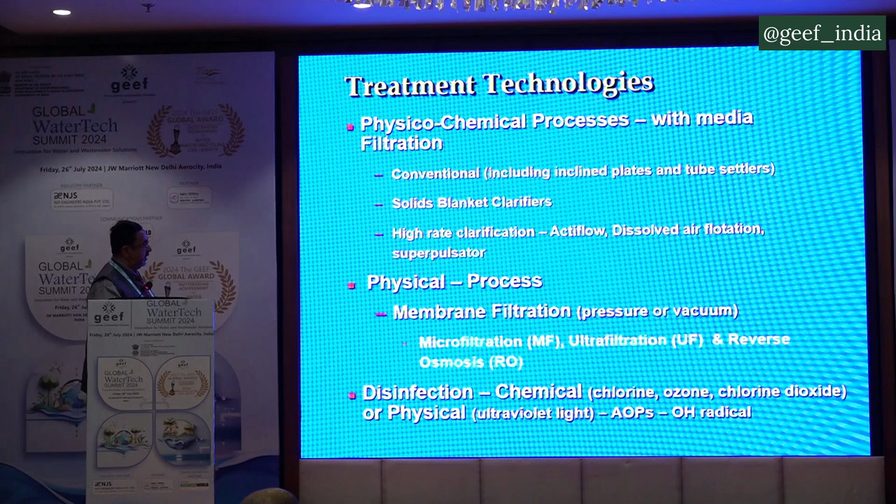Then the membranes came in. These are basically hollow fiber membranes, tubular membranes, ceramic membranes. So the advancement went slowly from the normal filtration process, which is your sand filter, to membranes, which are 0.1 micron or 0.01 micron or 0.001 micron and so forth. And the particle size gets lower and lower in the process, giving you cleaner water.

So that's an advancement. It changed the size of the plant, changed the footprint of the plant, so that gives you much better applicability in terms of water availability, because you can get 98%, 97% plant flow without much reduction going back to backwash and so forth.

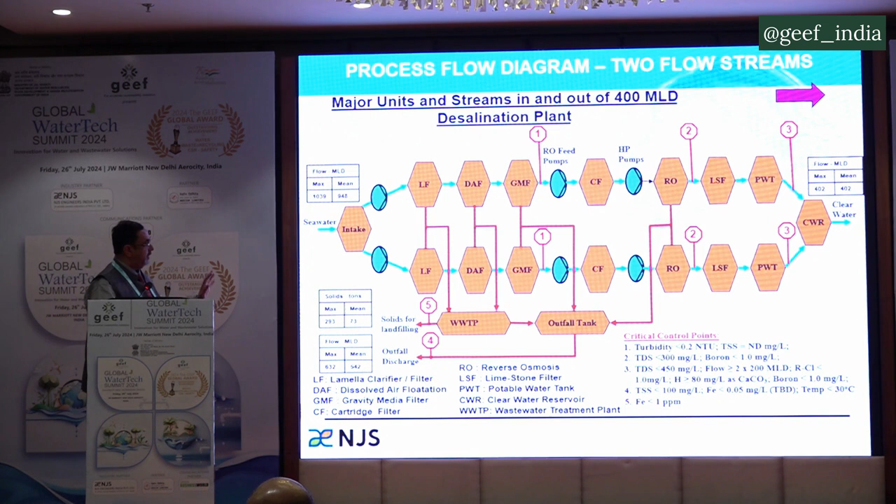Nowadays there's a lot of discussion happening. This slide is talking about desalination. I'm not going to go into details, but essentially the reason I'm putting this slide is because the cost of RO is substantially higher.

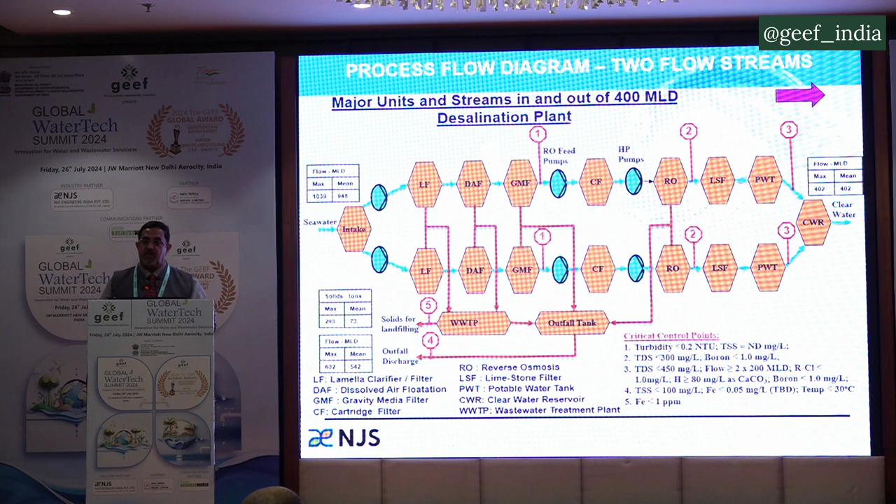Typically the electrical energy requirement is around 3.2 kWhr per meter cube. This changes the cost because that cost is now being shifted through power generation and energy recovery, and you can generate almost 45 to 50% energy back. That's a device that gives you much better energy for what you're technically using. That's an advancement in innovation and so forth.

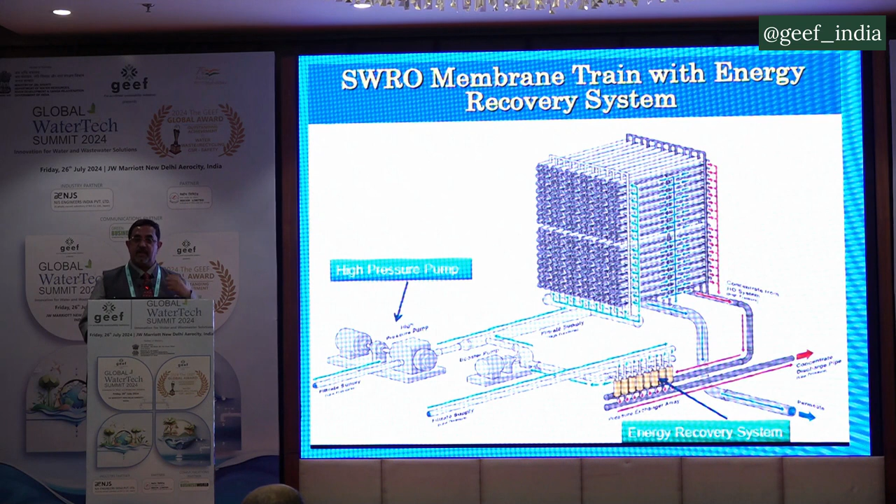What's happening in the industry now is moving to forward osmosis. It has come to pilot scale, 10 to 15 MLD capacity. But why has it stopped for drinking water so far? Because you need a stronger gradient across the water surface so that water can move from one end to another, and that is exactly happening on the industry side. It will come also on the water side to give you much better availability.

Why will it go so much faster? Because if reverse osmosis gives you about 2.8 to 2.9 kWhr per meter cube electrically, this will only give you 0.3 to 0.4. So the cost of water production will go substantially lower regardless of the TDS you're dealing with. Normal TDS in surface seawater is about 37,000 to 42,000 milligrams per liter, plus or minus some percentage. But that will make life much easier.

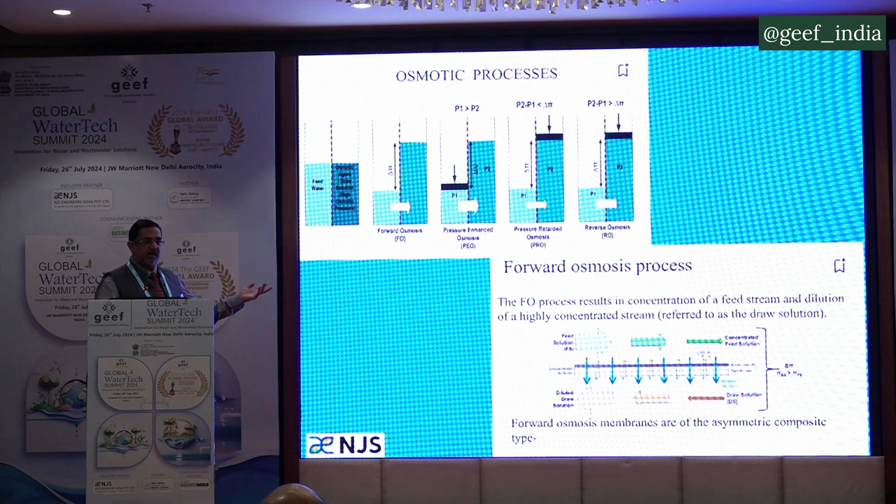There are a couple of players in this space. DuPont is doing it, Hydranautics is doing it, Suez is doing it. There are several players in this, and it will make a change in the water industry in the coming years.

Again, UV, Internet of Things, which is definitely happening on the water side, basically SCADA and analysis. But I'd like to point out, in India we're really not doing SCADA. SCADA is supervisory control and data acquisition. What we're doing now, predominantly under SCADA, is just the data acquisition. We need to start looking at supervisory control.

How do I manage? How do I operate the plant? How do I optimize the plant, and so forth? I can say this very strongly because I am a Class 1 certified operator, so I know what it takes to operate a plant, what it takes to minimize consumption, and what it takes to get the water quality out with minimal discharge of chemicals into the process.

You also can have water treatment process parameters, water quality, flow, pressure, you name it—sensors are there. In a lot of places, clients in India nowadays are asking for sensors. But please be mindful that the sensors need to be calibrated every now and then. If you don't have a calibrated sensor, it's as good as giving data that's not required, so we need to calibrate these sensors in a timely manner.

Demand and supply management, monitoring of distribution system networks for leakages—there are new entities now where you can put a ball into pipes from the smallest up to 200 diameter. The ball floats through, with GIS connectivity, and you get a hiss sound if there's a leak. If there is no leak, the water ball just passes through. So there are several of them.

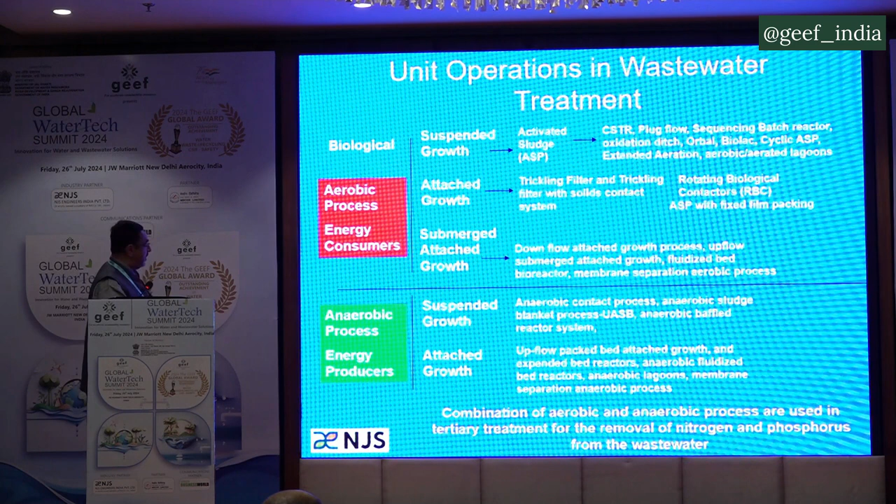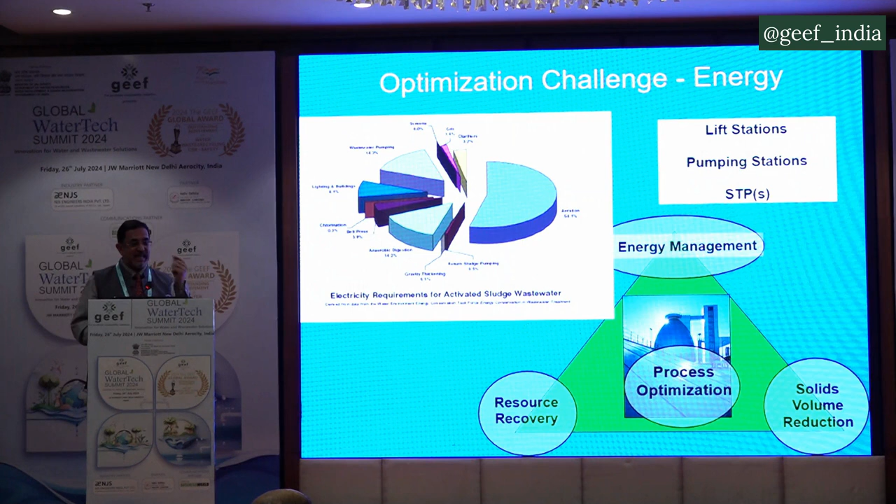Most prominent in wastewater is your energy consumption, so we need to optimize that. There's also your resource recovery management and solids volume. I'll talk about solids volume at the end, because when we talk about water and wastewater, we only talk about the liquid side. You need to also take the solid side into consideration, because that's where the money is at this stage, and where the amount of recovery on your interest should be in the process.

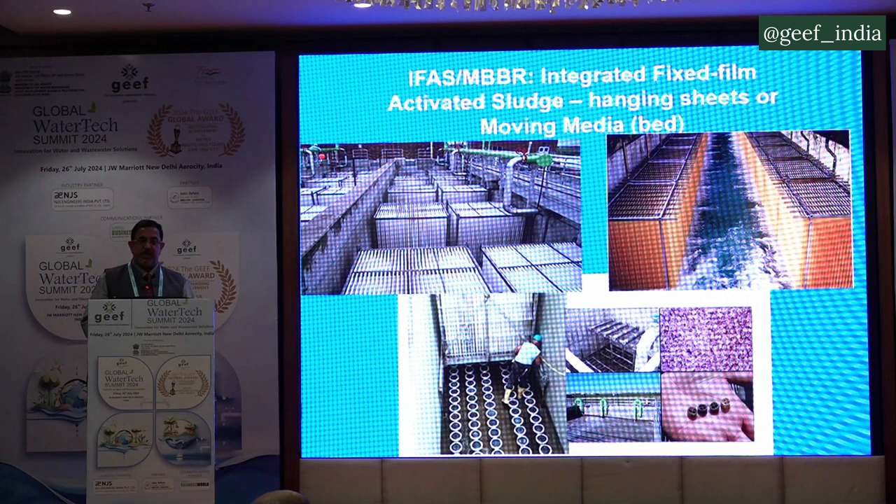This is just a different slide showing, instead of normal activated sludge, you can have hanging sheets, smaller areas, smaller materials put in, basically changing the surface area and reducing the footprint of the plant.

Oops, got stuck somewhere.

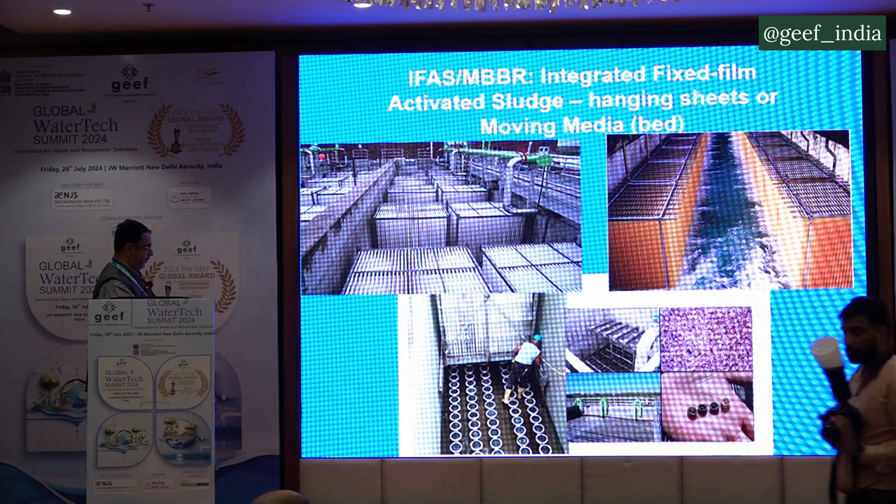There we go. Then there's one developed in Japan called DHS, downflow hanging sponge. Same idea, change in footprint, smaller footprint, bacteria grows inside the process, and you can reduce your systems.

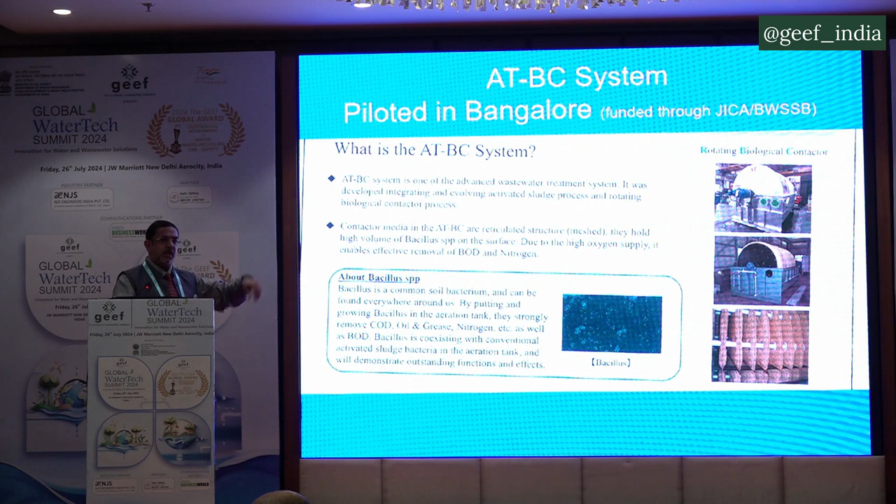ATBC is another one, developed by Toshiba and ATBC Corporation. Essentially it's got old rotating drum contactors, but has a covering on top of it. If you look at the covering at the bottom, it has bacteria ingrained into it so that they will do the trick you want to reduce it.

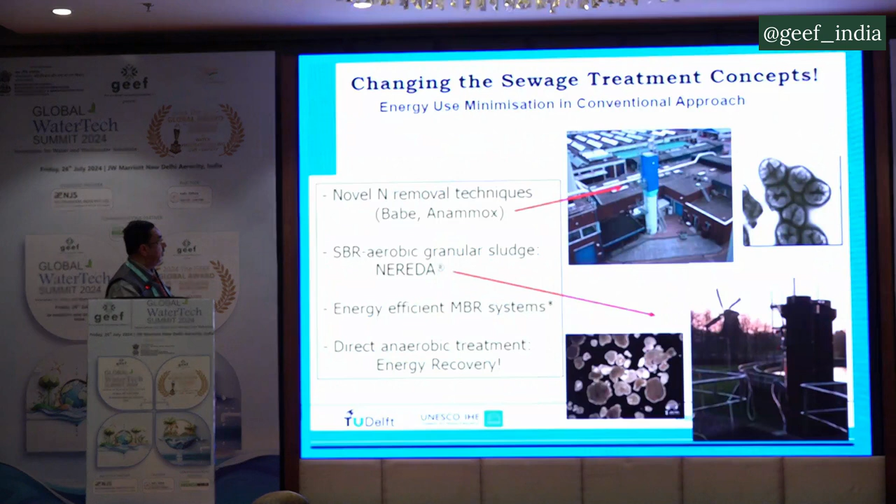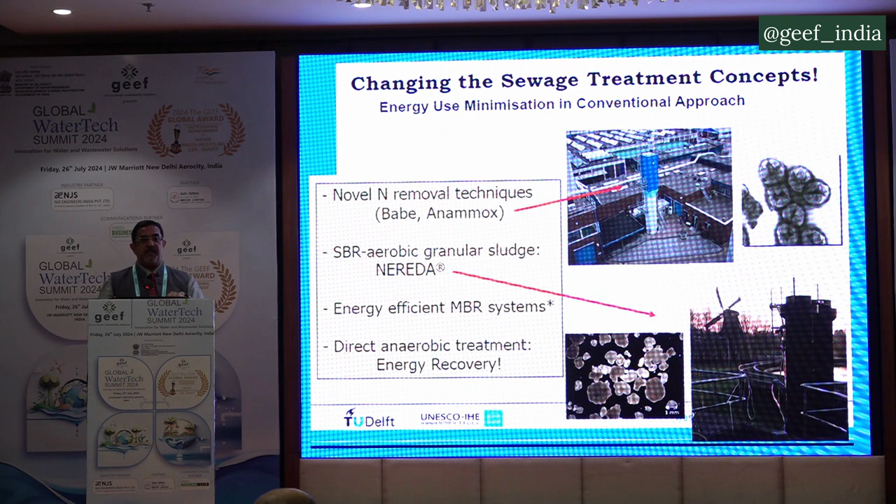The next concept was brought in by the Netherlands, very unique, creating novel removal through your SBR Nereda process. Essentially, you are forming a globe of bacterial conglomerate with solids, and that globe and the solids act like an anoxic, anaerobic, outside-inside process system. So you can get nitrification and denitrification at the same spot without changing the equipment in the process.

Here again, the membranes can be utilized. What's the next big thing? If we're looking at nitrification and denitrification, that means ammonia going to nitrite to nitrate, and then nitrogen at the end of the process.

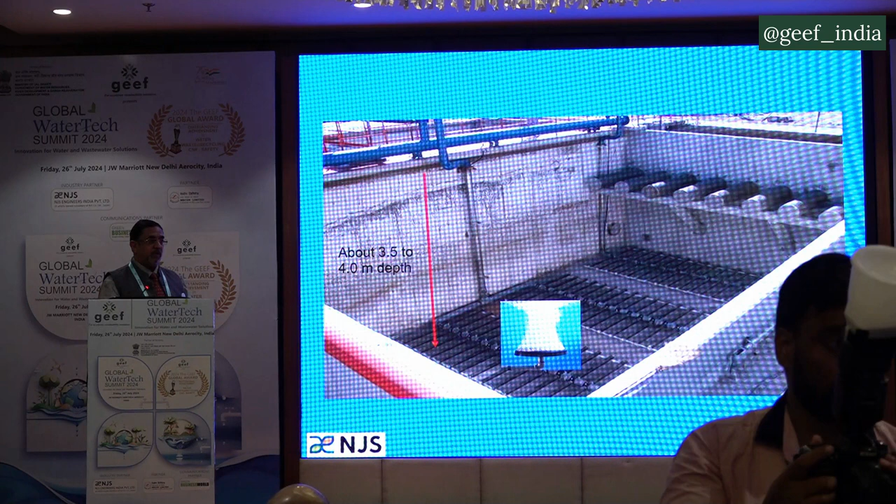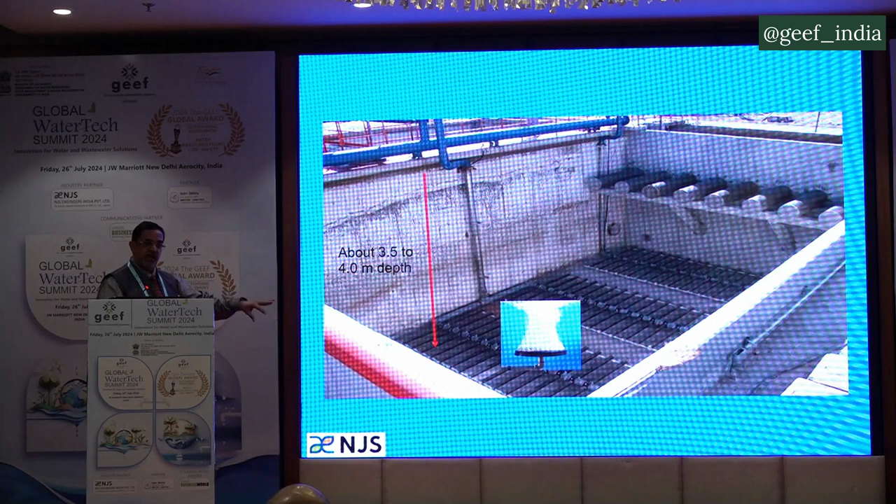If you take a normal sedimentation basin or aeration basin in your wastewater plants, at the bottom there are normal headers where aerators come out and air bubbles are released. Normal depth is about 3 to 3.5 or 4 meters. There's a definite amount of head required for the bubble to transfer air into the water so it gets perfectly oxygenated. There's a limit to how much it can do — only about 30%. That's the current situation, which is why you need a larger amount of bubbles, a larger amount of pressure, and a larger amount of energy required to push all of that.

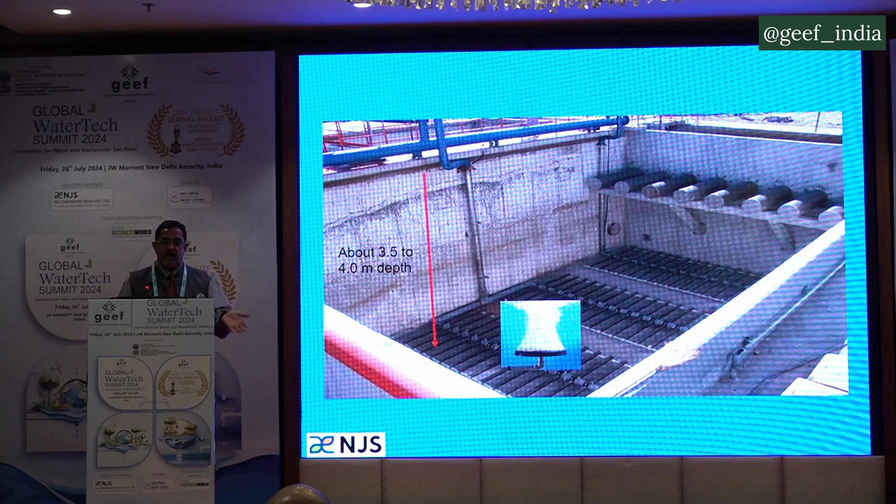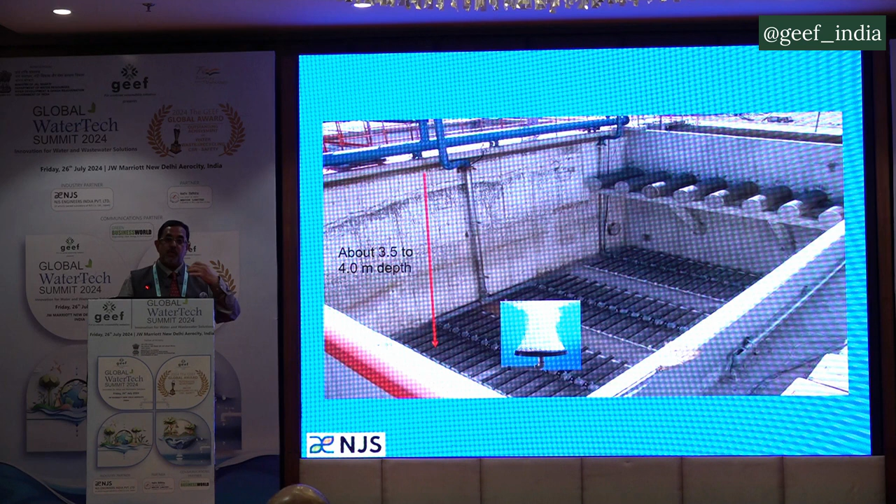What has changed now is what is called MABR, membrane aerated bioreactors. In earlier versions, we've seen membranes used as a separation material, meaning separating between solids and liquid.

Whereas now the next one is, they're pushing air through the membrane, and because of that you get simultaneous nitrification, denitrification on the surface of the membrane. Essentially what happens is air is pushed through this. If these are the brackets, you can lower that down into the existing tank and then push air through that.

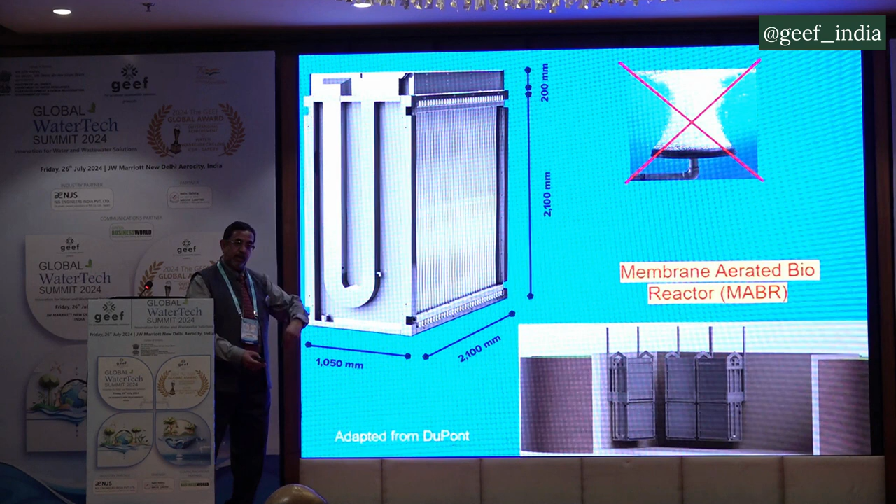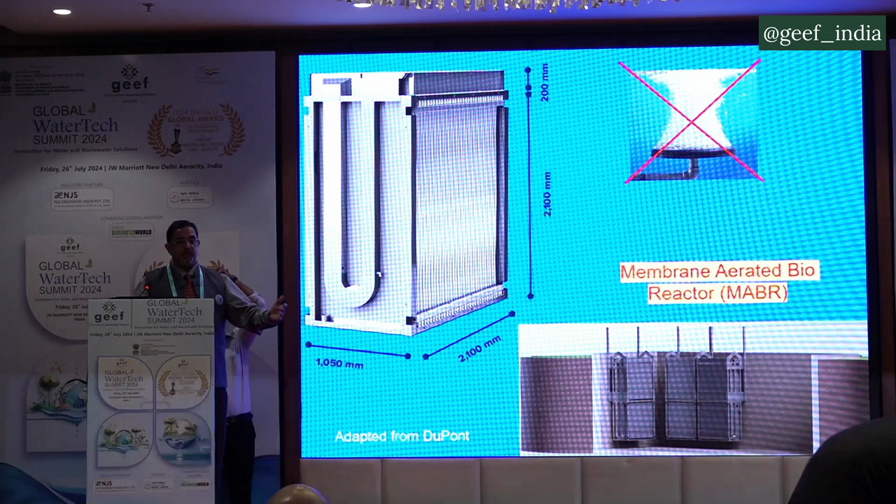What happens because of that is you get almost 75 to 85% transfer of oxygen to the water, thereby reducing your requirement for oxygenation, your requirement for blowers, your requirement for pipe sizing. You can also go deeper. If there is a space requirement or a space problem, instead of 4 meters, you can go 6 to 8 meters and develop this particular aspect of treatment.

So this is going to be the future, and it's already happening. I believe NMCG, or National Mission for Clean Ganga, is already talking to DuPont for a program called ETV, Environmental Technology Verification Program, where they can bring in and provide this particular technology and showcase it for us here. As I said, bubbleless aeration device supports both biofilm formation and nitrogen reduction on the removal side.

Now, the next paradigm shift I want to talk about in the next couple of slides is: yes, we do water treatment, and we waste about 80% of it back to wastewater, but why do we waste that? We can't use it — or can we, using the concept of one water?

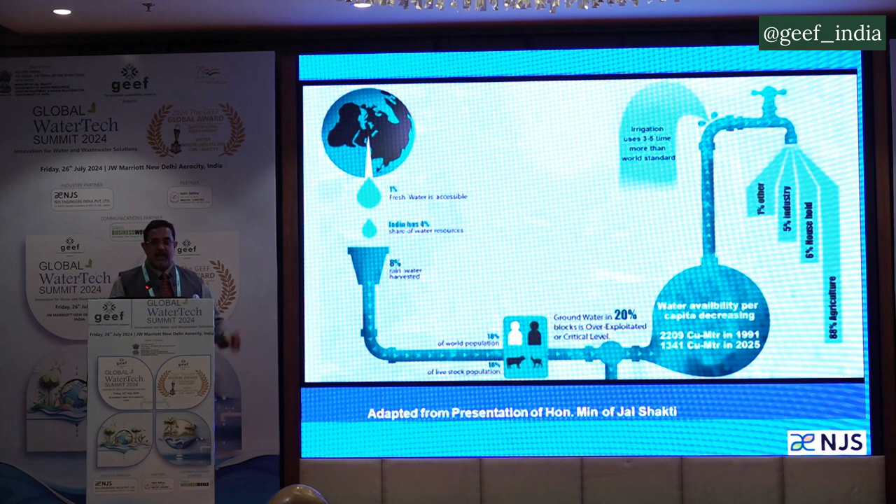So let's look at it — this is a slide I took from the Honorable Jal Shakti Minister, the one before the new one came in, before Patil Saab came in. Before that, it was Mr. Shekhawat — I took the slide from him.

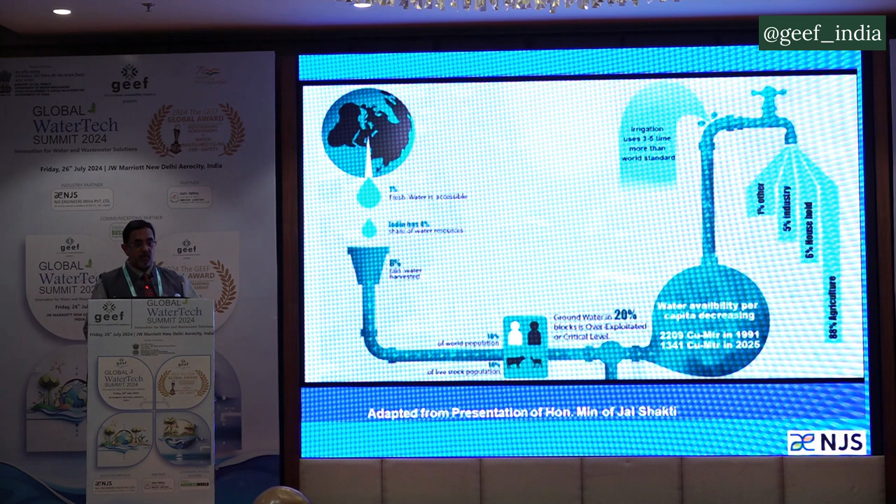Essentially, we're saying that the largest amount of water use is irrigation, 88%. Now they are also moving to safeguard that water through drip irrigation and controlled irrigation and so on, and then moving that amount of water back to the cities in the process.

This is the slide I want you to take away today if you have an interest in saving water, and I'll walk you through it.

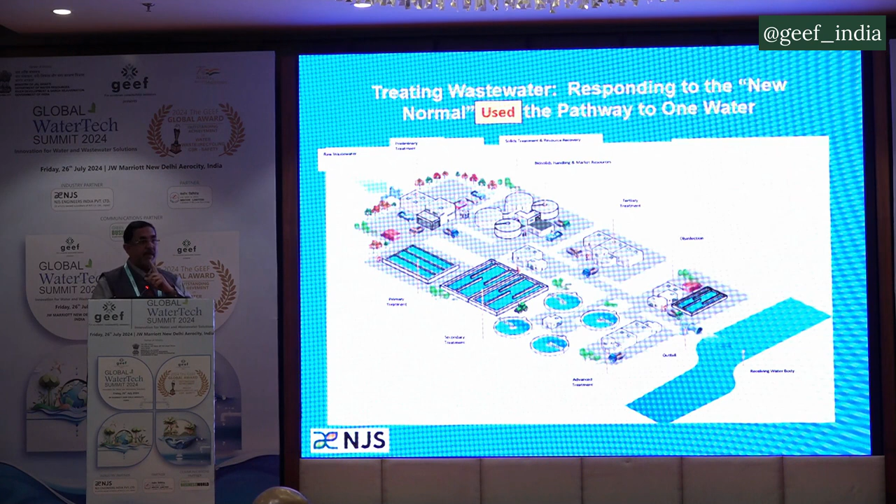If I use the phrase 'treating wastewater' or responding to the new normal — I say no, it's not a new normal now, what is it? It's an energy factory, because I can generate energy from the sludge that is being generated. I have generated nutrient, and I'll show you how you create nutrient, because phosphorus is very limited in the world.

The phosphorus fertilizer is very limited, so you need to create more. How do I create it? Because in the wastewater, you typically get 5 to 7 milligrams per liter of phosphate because of laundry waste and a variety of other waste. Can I use that to recover phosphorus? Yes, you can. It is not fully cost effective yet, I understand, but over time it will become so — that's an innovation we need to look at.

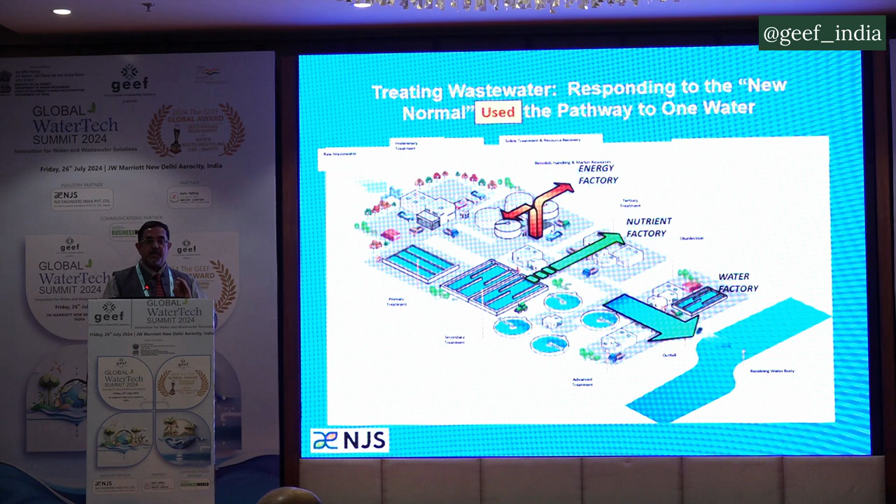Lastly, a water factory — it's not wastewater, it's a water factory providing water. I would rather say augmentation of surface water is feasible through this approach. So rather than calling it a waste stream, I will call it a value stream, because that's where the money is going to get more into the process.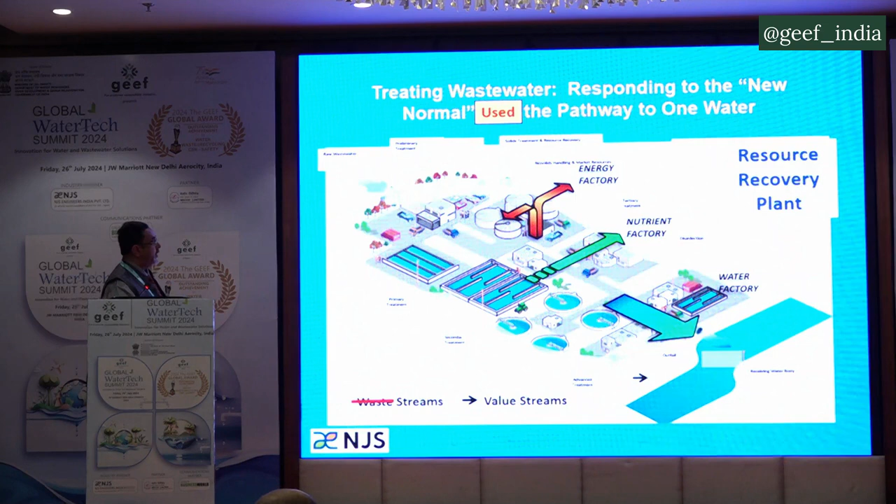What happened here? Let's go.

Now when we talk about recycle and reuse, moving from conventional to unconventional — if you look at it, there are no regulations directly involved in India at this stage. There are certain regulations in Western countries. And if you go to the top of things, potable or indirect potable reuse, then certain regulations have been formed.

For example, California is the second state — Colorado is the first state, California is the second. Florida is making regulations right now. Some things are happening in the UK, some things are happening in Australia, where they are looking at indirect potable reuse.

What is indirect potable? Indirect potable is where you treat the water to the highest quality, put it back into a reservoir, and then take it on the other side for treatment and distribution. Why is it more famous? Because I call it a psychological barrier — technologically, I can give you any quality of water you want, including water treated to the quality of the bottle in front of you, even from treated wastewater.

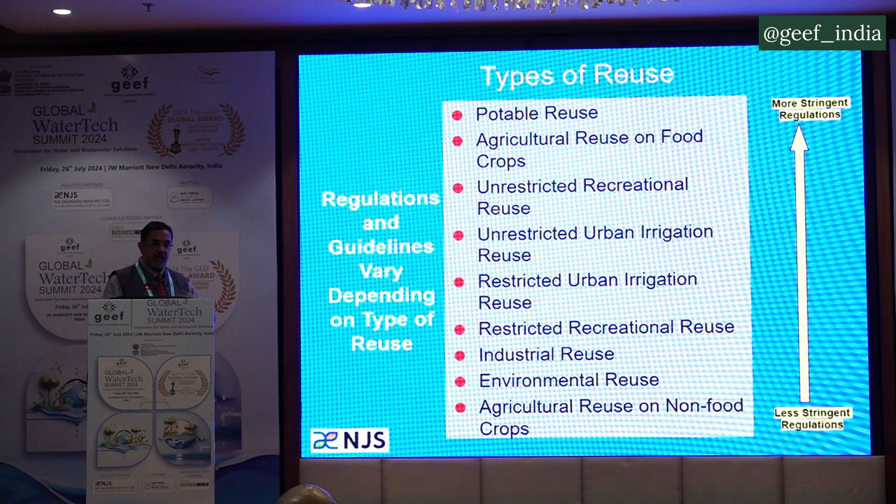But at the end of the day, psychology overcomes the technology and says, nah, it's wastewater, I can't do that. That needs to start to change. These regulations need to come, and we're working on it. I'll show you in some of the slides what I am working on. I'll give you one classical example that we have worked on. I was the lead design engineer for this.

When we did a project in Agra, if you look at it, the Yamuna, when it flows from Delhi onwards through Haryana to Agra, is literally exhibiting secondary level sewage: 30 to 40 milligrams per liter BOD, 40 to 45 milligrams per liter ammonia, and so forth. Previously, they were using chlorine as a strong oxidant. You walk into that old plant, you start crying, because they were using an 85 to 90 milligrams per liter oxidant or chlorine dose, with all the effervescence coming in.

Funded by JICA and, at that time, the Government of India, Ministry of Housing and Urban Development, we suggested that let us treat this as wastewater first, so that we can utilize that ammonia, the biosolids, the BOD coming in, and then put a membrane filter instead of a regular sand filter, so that it has a physical barrier and nothing will escape. This plant has been working for the last 12 years consistently. The Honorable Prime Minister at that time inaugurated it and gave thanks to all the people who worked on it.

So if you look at it, the top portion is working like a wastewater plant. It is a moving bed biofilm reactor. Microbes grew. I don't have a picture here, but microbes literally grew inside and did the trick. And as I said, if you engineer it properly with Mother Nature's help, you can get what you want in your footprint. And then essentially you can get very clean water. It's going right into their distribution system.

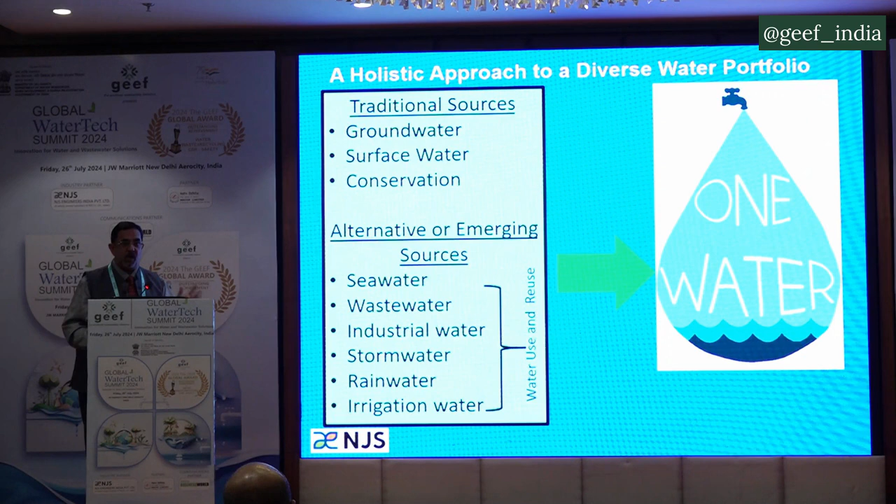Traditional sources: you can take groundwater, surface water, and then conservation, like rainwater harvesting. When the earlier DG was there in NMCG, they came up with a nice tagline, catch the rain where it falls, when it falls. That's where conservation comes into the picture, and you can use it for groundwater upgradation and so forth. But you can also take seawater, wastewater, industrial. Essentially, you get a one water concept: an integrated planning and implementation approach to managing finite water resources for long-term resilience and reliability.

Why am I saying this? This is what we are doing in Mumbai. Mumbai has enough water, but they want to be sustainable in the future if the rain doesn't happen. In the last 10 days it has rained so heavily that all the reservoirs are full, but it's not going to be like that; it's going to be erratic down the road. So they are looking at how to treat wastewater to drinkable quality. In blended direct potable or indirect potable reuse, you have 3 basic parameters. The foremost important, leave aside technology, is the public outreach program.

In that project, it's a 12 MLD plant, and a 0.1 MLD or 100 cubic meter per day pilot, put in a tractor trailer with all the processes known worldwide and being used in California and other places. It's at the bidding stage. It'll probably be operable in another 4 to 5 months.

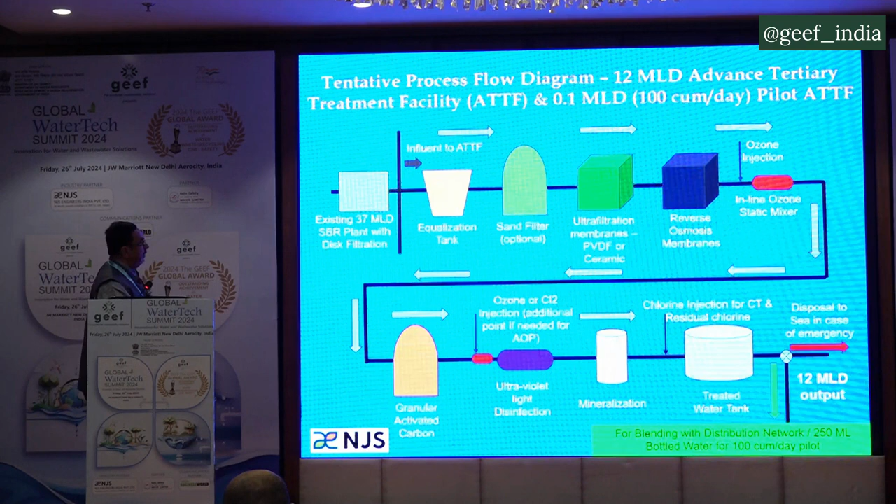Please do come, because one of the interesting facts is what we're going to do: if Singapore can do it, we should be able to do it also. We will put a bottled water plant at the bottom, 250 ml bottles. We'll distribute to you, drink with you, and make it proof. See, ultimately, you can get the water. You need to remove the public stigma and say, okay, this is available.

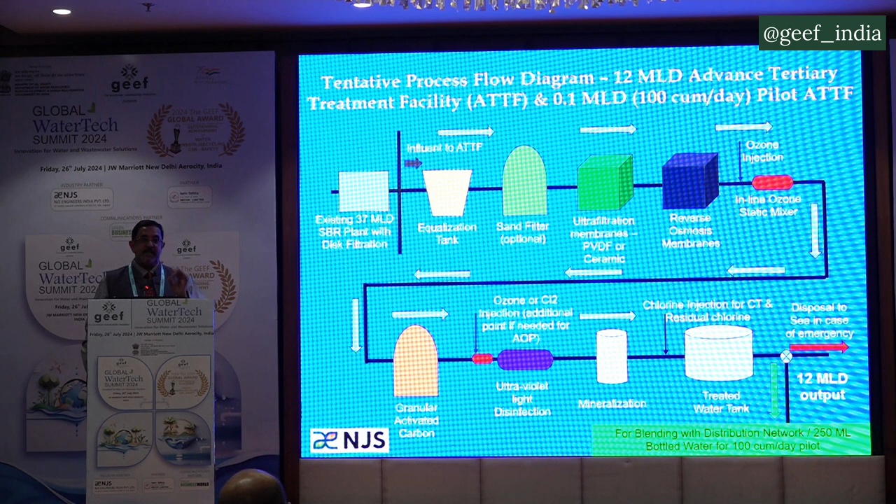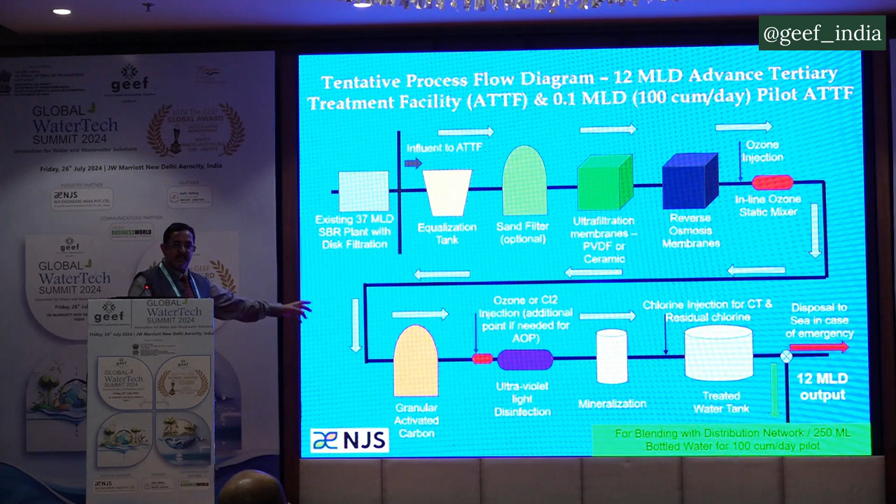But what makes this type of water quality, what makes this type of process more important is data, data, data, and the factual information given. You can't say, oh, this might be possible. No, you have to give full-scale data and get trust. That's the driver for this type of water to happen.

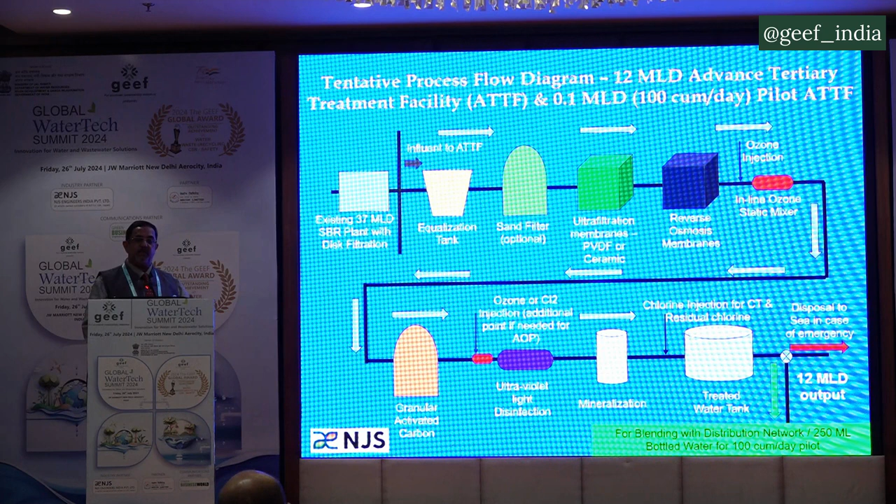Essentially, all these processes will be built into the process. We'll have a 0.1 MLD plant going for 2.5 years during the construction phase of the 12 MLD. So definitely once it starts, please give me a buzz or email, and I'll be happy to have you there.

This is what we've done the last couple of years, taking different projects. USAID funded this for Delhi Jal Board when we did the project, and we put Singapore's bottle next to Kinley and Bisleri, and also the USAID bottle. So we know what is there, what we can get and where we need to go. This is the project, and we've given it a title: Together, let's create pure water from used water. We named it Nav Jeevan, Nav Neer, Jeevan, life and water together.

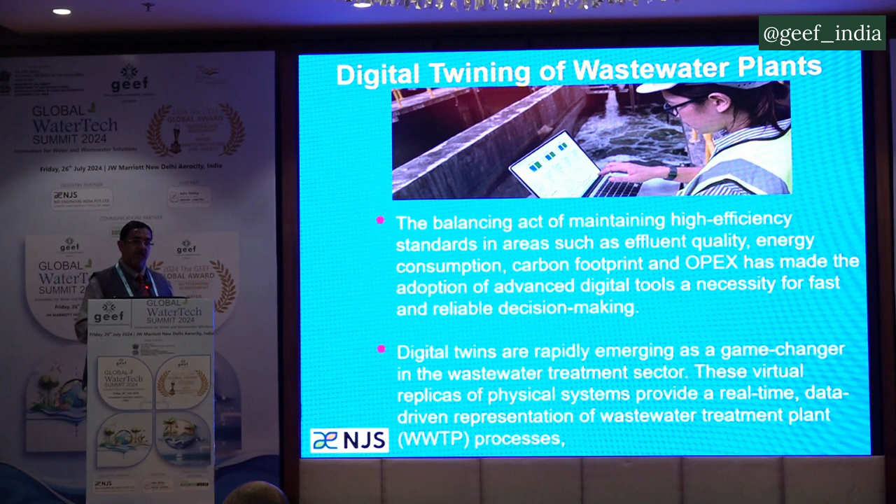Digital twinning, same case, we can utilize for balancing, for maintaining operation and so forth, and it can be a game changer for operations and operation systems in the process. Internet of Things, same issue. We can have a lot of sensors, data-driven, data analytics, and so forth. So you probably have that.

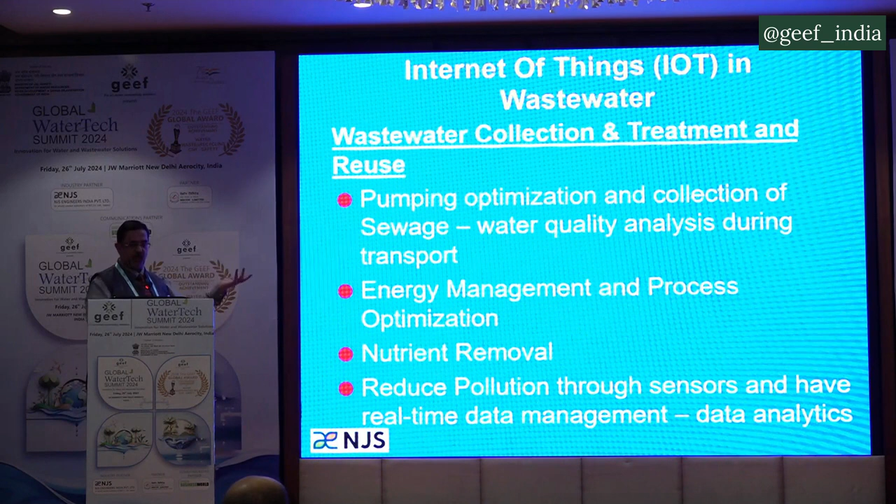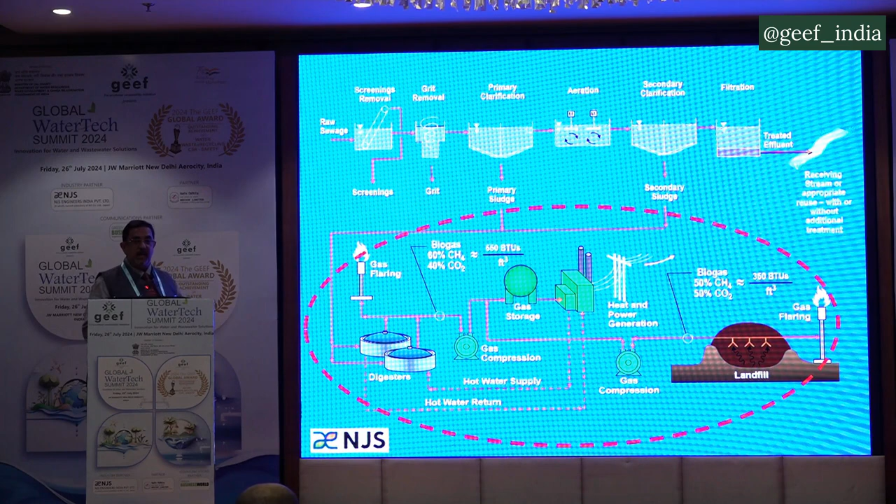And the last one: now we talked about water, but there's something else we also need to take care of, and we have not done that, which is solids. Solids can give you energy, carbon, fertilizer, and also a reduction in volume so it doesn't pollute the rivers downstream. So I'm going to talk mainly about the lower portion.

We just finished a study for the Ministry of Jal Shakti and NMCG; we were working for NMCG under the Norwegian grant to do a manual and distribution discussion with cGanga, NMCG, and Norway. This is where we came up with that you can literally do power generation, bio-CNG, gasification, pyrolysis. We also did pyrolysis using torrefaction, where we take the dried sludge and make briquettes, and from these briquettes you can use about 10 to 12% as additional fuel for the process.

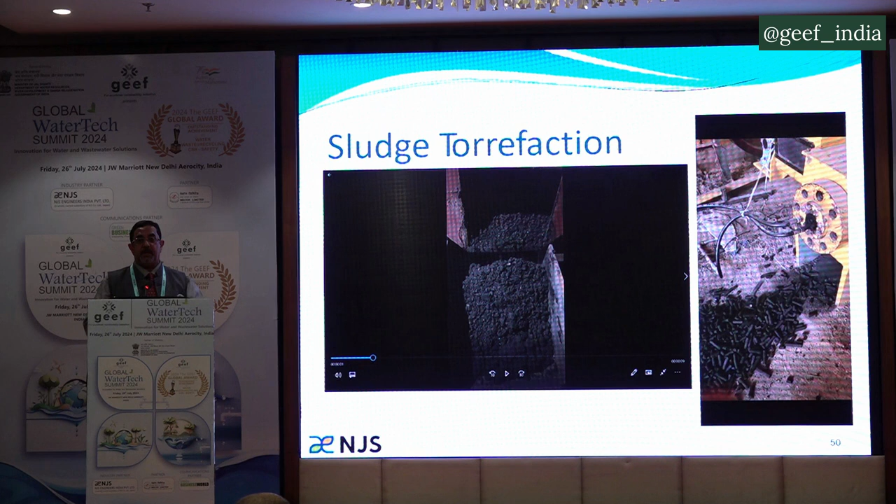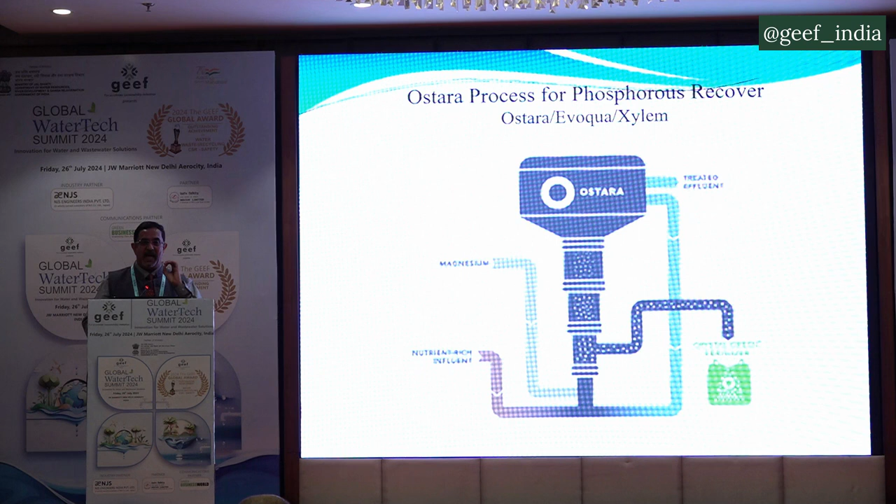This is sludge torrefaction, and it gives you briquettes. Why briquettes? Because they're easier to handle. Particulate matter is also explosive; it becomes very risky to handle and an issue down the road. There is another process called Ostara, which basically generates pellets of phosphate fertilizer. You can utilize that because you can get magnesium and polyphosphates in your digesters, which can be utilized for this particular process.

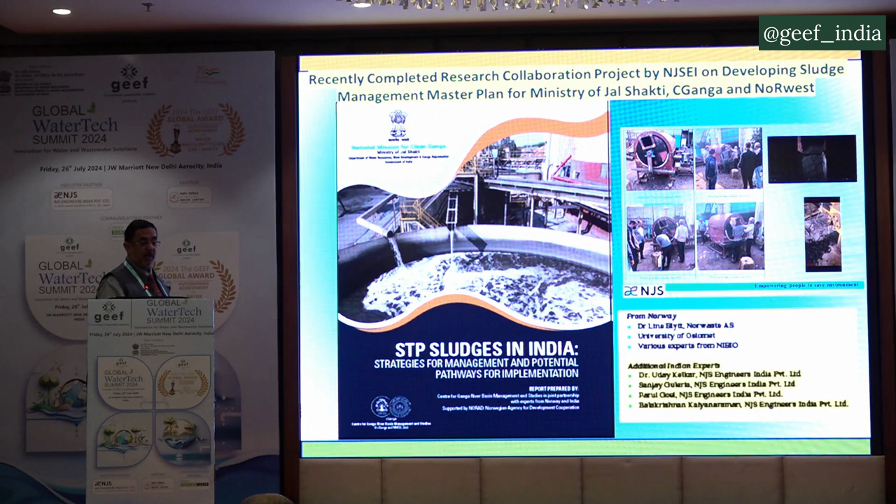Lastly, this is the slide I want to show. This is for STPs and sludges all over India. We're now doing the second phase of the project with Norway, cGanga and NMCG to come up with the regulation, what to do and how to utilize this sludge as a carbon source, as fertilizer, as well as any other material, provided your sludge does not have a lot of contaminants or heavy metals.